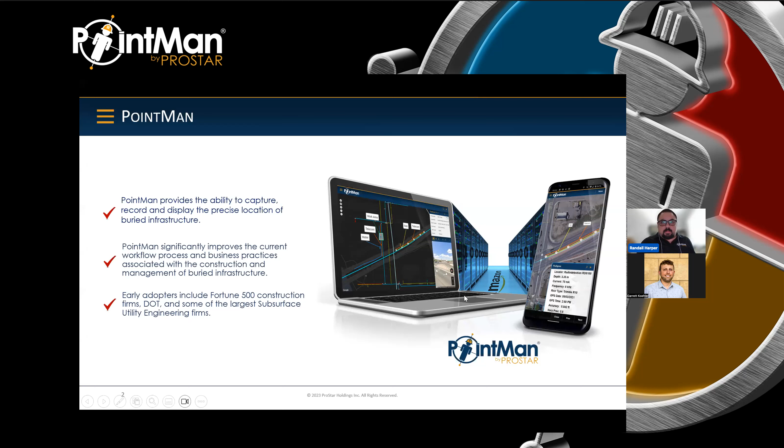It impacts several industries, including construction, DOT, oil and gas, engineering, railway, municipalities, mining, and utilities.

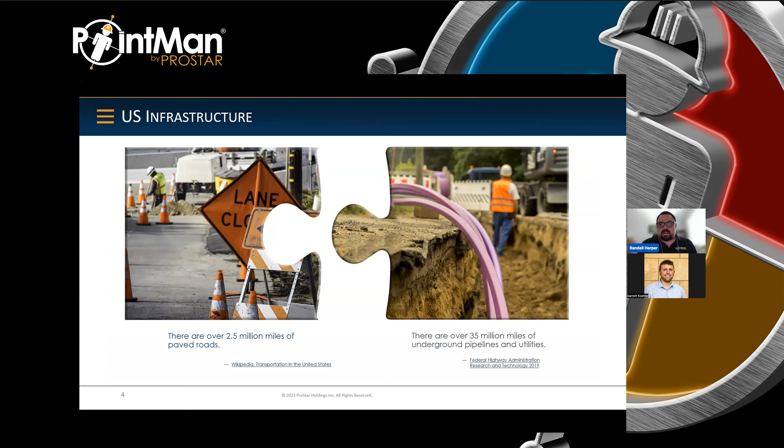At least in the United States, I'm sure this is true in Europe as well, you have surface features like roads and utility poles, and then underground features. There were 2.5 million miles of paved roads, and there are 35 million miles of underground pipelines and utilities. But the fact is you can't work on one without working on the other.

So how do you deal with that? When you live in a major city, this is kind of what it looks like underneath the ground. This is obviously a worst case scenario, but it looks like this pretty much across the globe, because when people first started using pipelines and cables to bring water and sewer to places, it started without any record keeping and any regulations to say this is where things should go, this is how things should be. So it just became what we like to call a spaghetti bowl underneath the earth.

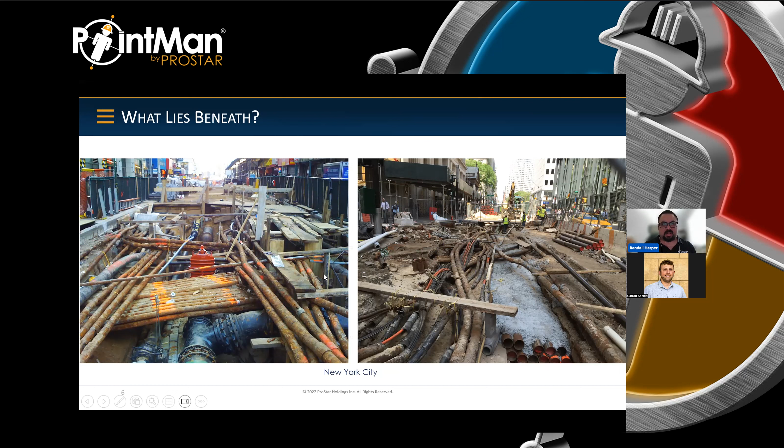These are U.S. industry statistics, but they're pretty common throughout the world, depending on how advanced your SUE is. This is 500,000, the number of strikes per year, according to the 2019 DIRT report. That's an estimated $10 billion that it costs to locate that underground infrastructure. And despite the amount we spend locating, there's still $30 billion in damages that impact the economy.

So these are just some pictures of examples of what can happen when you damage underground infrastructure.

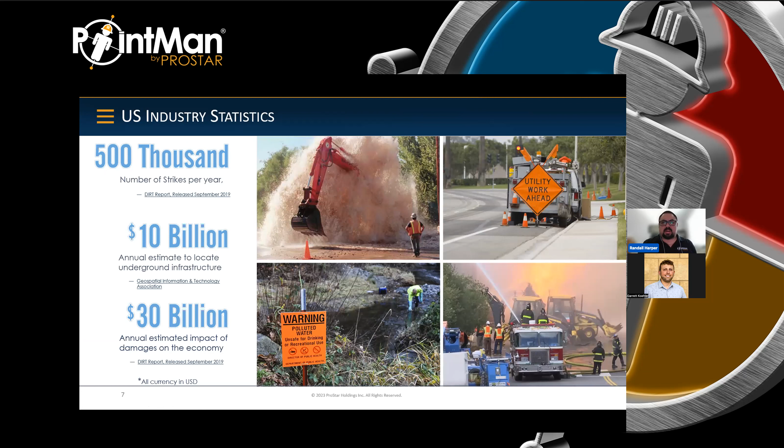All of these records tend to exist on paper maps or as-builts. So that's the big problem here: everything you do when you locate, especially in the United States, is put on these as-builts, and then your record is lost pretty much in the file cabinet somewhere right after.

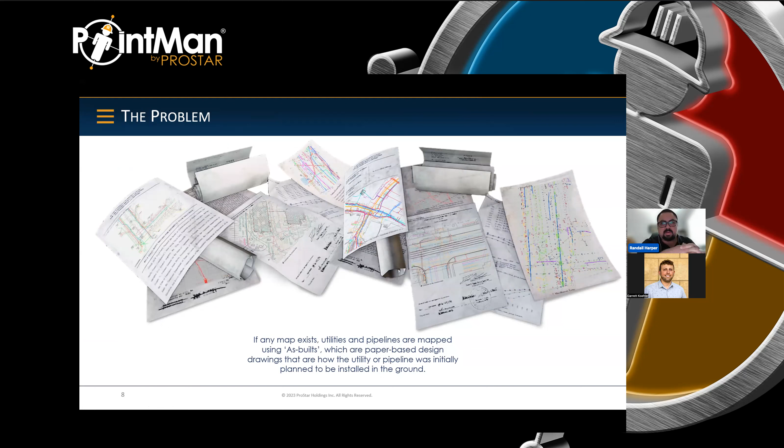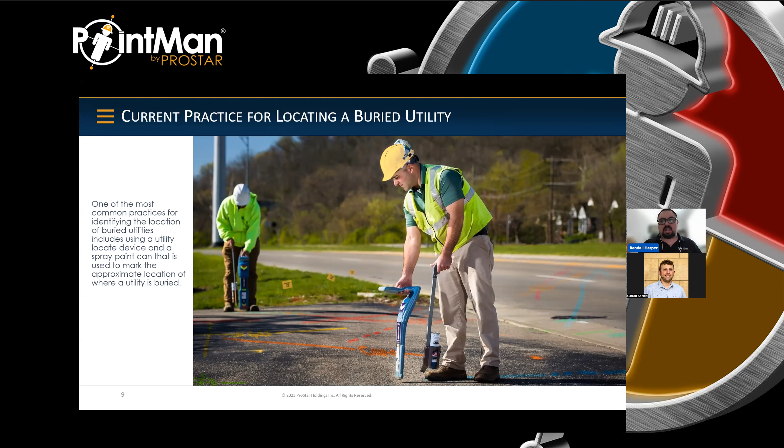This is the current practice for locating a buried utility using paint marks and a locator with no GPS unit attached. So while you might have, in that moment of time, a good capture of the data, it's lost forever because you're not actually capturing it with precision and accuracy. You get an approximate location of where the utility is buried, you mark it with paint, and hopefully a surveyor will come in later and record that data, but that doesn't always happen.

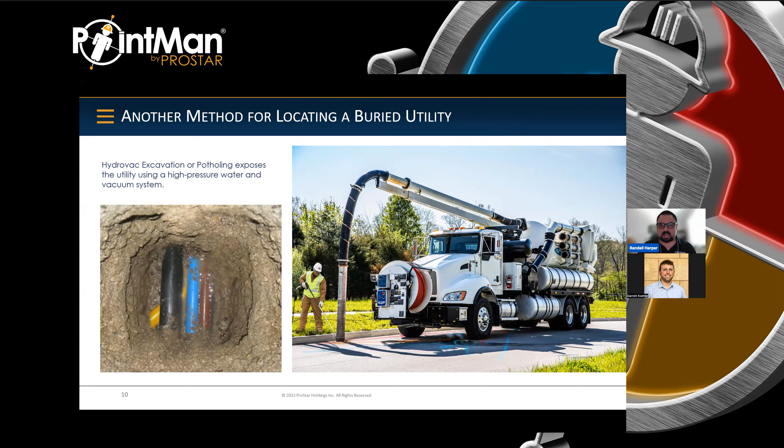Another method for locating buried utility is hydrovac excavation or potholing, which exposes the line directly, but it's expensive, it damages the surface, and it takes a lot of time to do. So it's not very common except on giant construction sites like highways and things like that, or large skyscrapers.

How PointMan works: you take your utility locate device and your mobile device and pair them via Bluetooth, then you pair your GPS to that same mobile device. So now not only are you collecting the EM locate device data, which is your depth, your current, and so on, but you're also getting the horizontal and vertical values as well, so you know precisely where that is located.

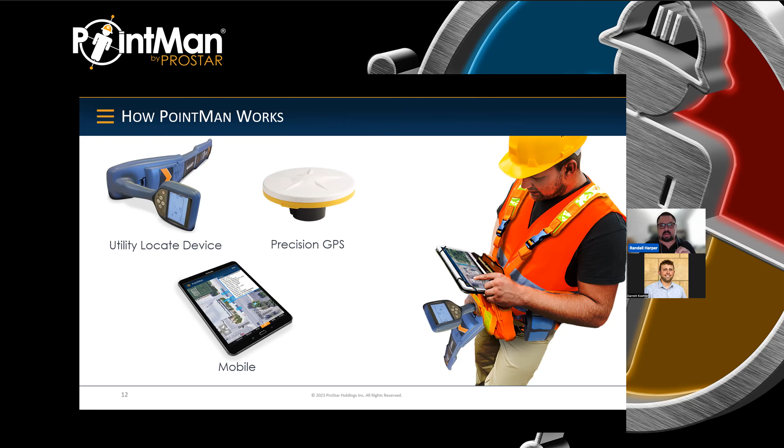For example, you might be locating a line that goes up the side of the street, and the reference they gave you on the as-built was that it was on the right-hand side over here. Well, that electrical line turned out to be on the left-hand side, and it turned out to not even be completely straight. This happens all the time due to ground conditions, such as maybe there's a big boulder under the ground, and you didn't want to go through it, so you went around it.

Another factor is a lot of these maps are drawn by GIS professionals or CAD professionals who haven't actually been to the field. All they know from the surveyor's notes or the engineer's notes is that it goes from A to B, and they might just have a direction on it with a length of line. It might say 35 meters west or 35 feet west, and that's as far as you draw it. You don't know if it curves or not, so you just draw it straight. And that happens all the time, at least in the United States.

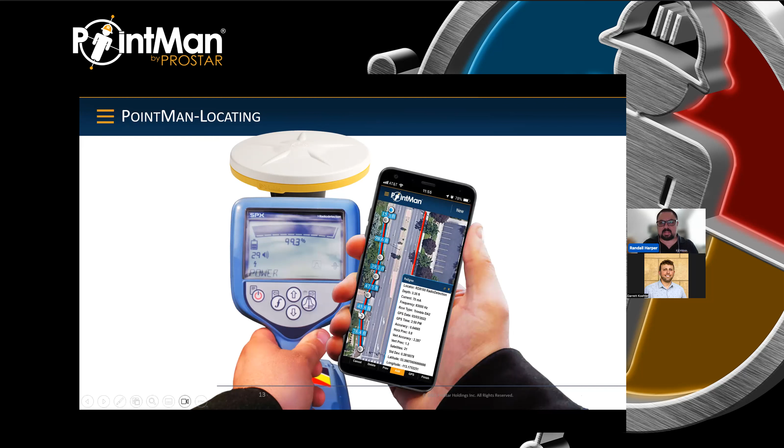So this is an example of what PointMan can provide. We have the ability to stake back to features that are already collected. You can see here that this point in blue where my cursor is, that is the selected point he's trying to find that he had already located previously.

In this box in the top right corner, it's actually showing you the west direction, the south direction, and the total distance it takes to get there. He's using his phone by itself, so the horizontal and vertical accuracy isn't the best, but you can still see in the right hand picture here that you can zero yourself in.

This time he's using an RTK, so you can see that the values are even more precise up here. That's the beauty of PointMan: you can use your phone GPS, or if you have the capability and the funding, you can upgrade that into an RTK GPS quality, so your precision will go even better.

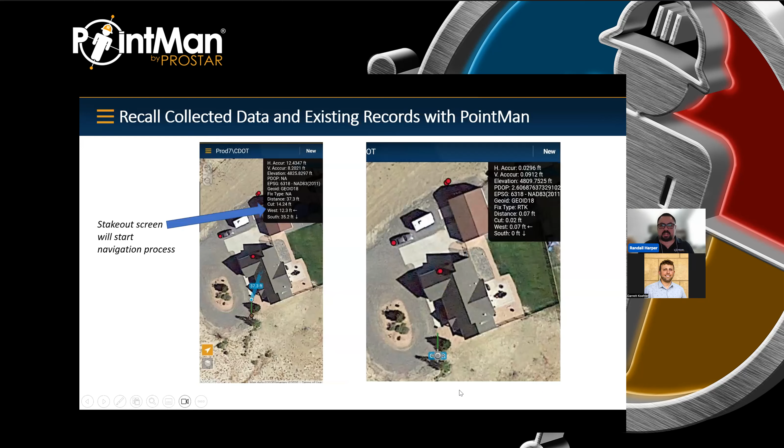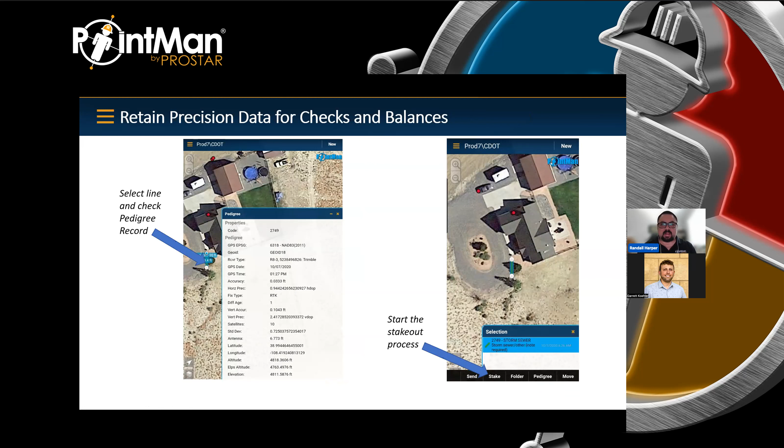This is the ability to look at your data and say, this is worth keeping, or this is not worth keeping. If you look at the precision here, you can see that this was done in RTK. The accuracy is 0.0333 feet, and it even has the HDOP and the standard deviation here. So if you're an engineer or a surveyor, you can actually look at that data and qualify it. I'll get into that a little bit later.

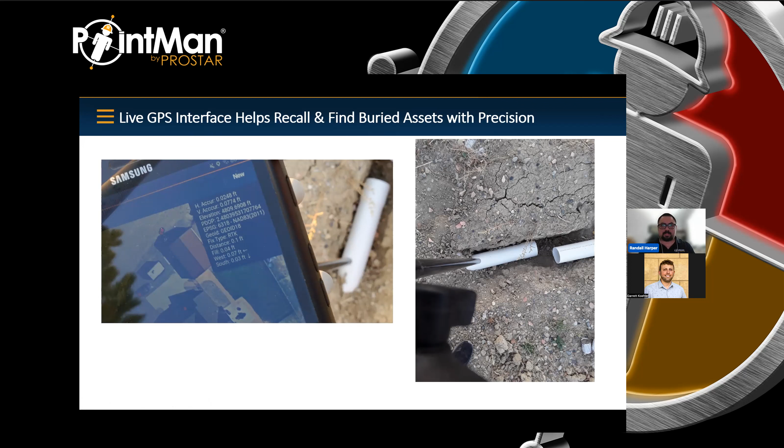This is just another example of the live GIS GPS interface. This is a screenshot of an actual phone, so you can see what it looks like through the perspective of the user as he's staking a line.

ASCE standards in Europe are much more strict over there than they are in America, but we're still trying to catch up. That's one reason why EM locating is so important here and why PointMan is becoming such a powerful tool for electromagnetic locates.

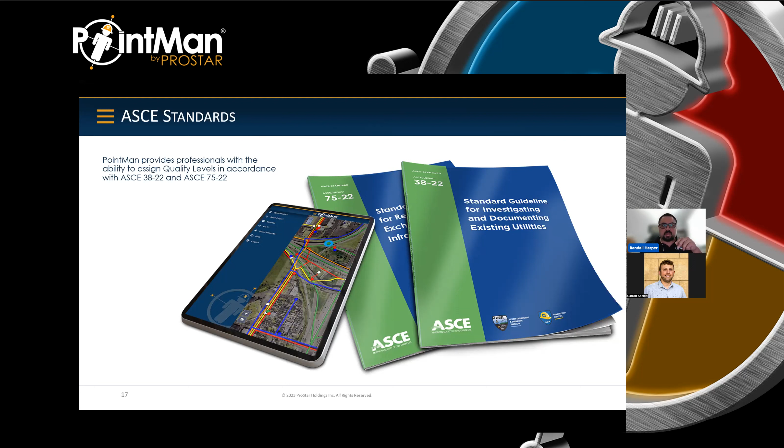We are able to assign quality levels through an engineer by using PointMan's collected data and other things like photos and sketch maps, as well as forms and things like that.

So initial adoption: we have Kiewit, who is the largest construction company in the United States, and CDOT. They mandated PointMan into Colorado state law. They started using PointMan because they actually ran a test on two large projects.

One of them was about 10 miles long with 150 people, and the other one was about 10 miles long with 200 people. They were both about $10 billion in value each. Well, one of them had PointMan. The one with less people, 150 people, actually ran PointMan on their staff.

Every member of the group had PointMan who was in the field, and they were receiving daily updates, constant updates, through everyone collecting data and sharing data, and everyone in the other project was not. They were still using paper maps and traditional methods to share their data.

Over the course of the projects, which was about 3 years each, the first project with 150 people and PointMan reduced their line strikes by 97%, to the point where they were literally having three in the last year. The other one ended up paying approximately 40 million more in damages and lost time and safety briefs and truck rentals that they couldn't use, and all those associated expenses, because they didn't have PointMan to offer the visibility and safety that it provides.

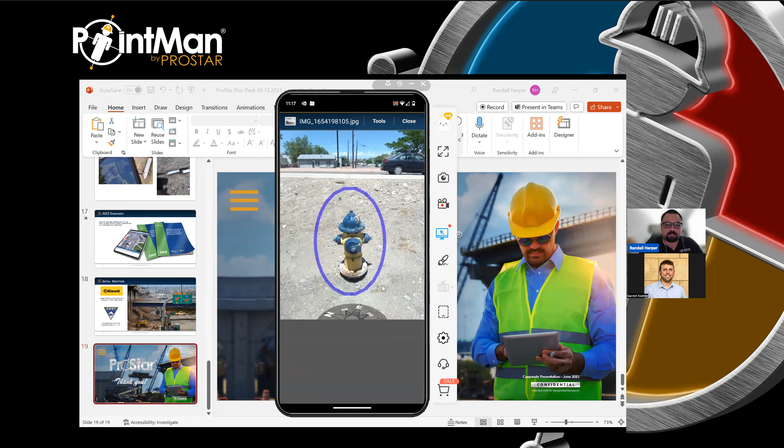You can see all this metadata in here. It even shows the user that captured it, what devices were used to capture and store the data—so, TDC 600. You can transfer data between devices by just uploading KMZs and shapefiles. If you had the cloud backend, you'd be able to sync everything through the cloud just by connecting to Wi-Fi or an internet service.

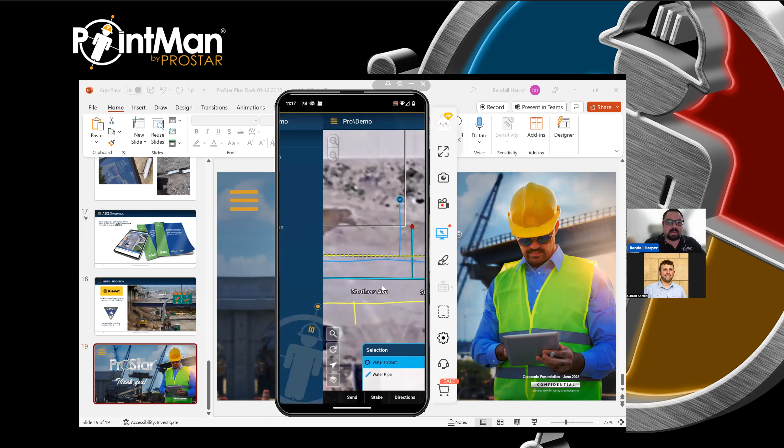But let's get into the backend here. So I'm going to go to settings. This is the meat of the system—this is where you would set up your device and connect it.

As I understand it, the latest and greatest radio detection unit has an RTK unit, so you would actually connect that one through the internal GPS device, and same with the locator. It would look like this, and you'd have your serial numbers in these two boxes on the right. There's a specific pairing process I can share with you, and if you're interested, we can take a look at the help file.

It goes to a sort of Wikipedia page, and you can see there are different brands that we can connect to—so radio detection as a locator.

Right now, as I understand it, we won't be doing a public announcement until Utility Expo, which is in two weeks. That's when our website's going to be updated with the RTK model. But for now, this is the pairing steps, and it's pretty simple.

You just go into set your Bluetooth to ASCII, turn your Bluetooth on, and then go to pairing mode, look for BTPC, and the Bluetooth icon will flash—that's when you can pair with your phone. When you pair it, you'll get the serial number here after going through configuring Bluetooth and pairing your device. So it's a pretty simple step process.

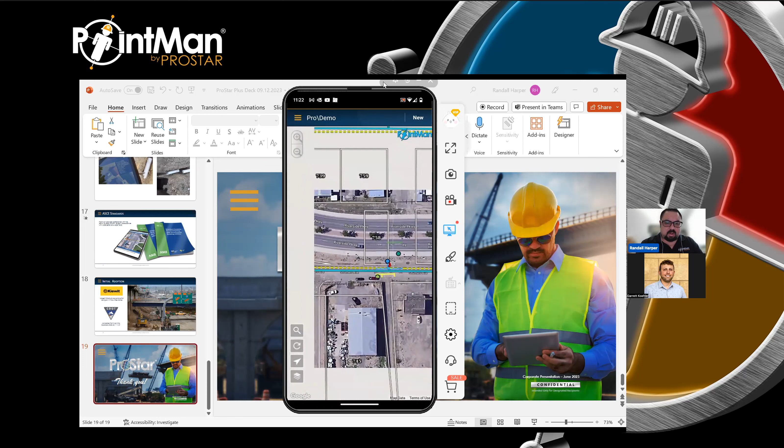Yeah, that's kind of PointMan in a nutshell. I'll just show you quickly how to capture data and then I'll open the floor. I know it's late for you guys, so I'm trying to make sure this doesn't take too much time. So I'm gonna hit the new button and choose my system here.

I'm gonna go with telecom, and you can see here I have a bunch of things in the data dictionary. These are all fully customizable, so whatever you want in here, whatever you're collecting, you can get it in there. So I'm gonna choose cable in this case, hit OK. It says owners required, so I'll just add an owner in here and call it XL.

Now it says failed to locate. That's because I forgot to set this to internal since I had it set on radio detection before. I'm not actually connected to a unit because I'm indoors right now, so it would be kind of useless. So I'll turn off my GPS and hit the add button. And merely by tapping the screen, I can draw a line out, and all I have to do is hit finish.

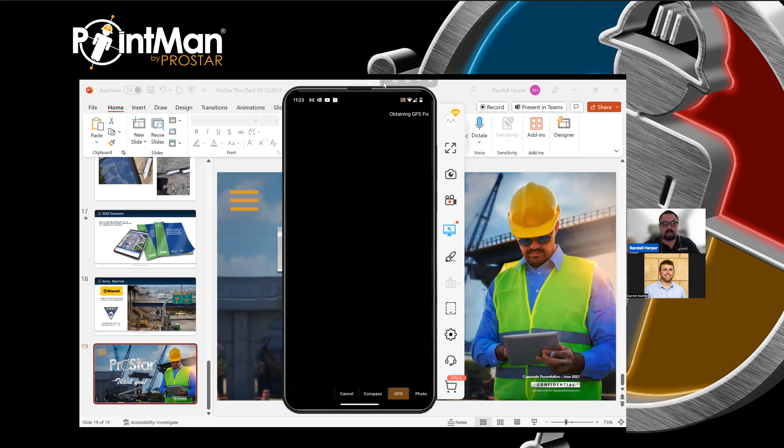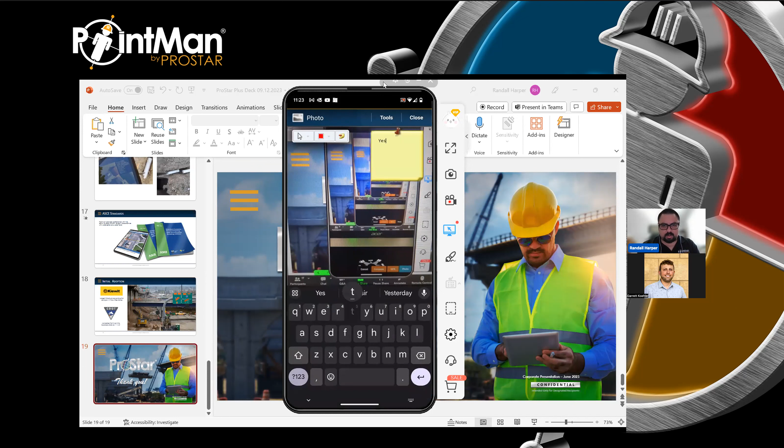So just like that, I drew a line in. Now, what makes the integration with radio detection even better is that you don't actually have to tap the add button and then tap the screen to capture data. Because we're integrated with radio detection, all we have to do is hit the locate button on the actual hardware and it'll save directly to the PointMan application. It's just that easy.

All right, here we go. So NTRIP is really simple.

As long as you have, we have Trimble Catalyst and RTX sort of natively included, but you can always add a custom one. We can do DIP or NTRIP.

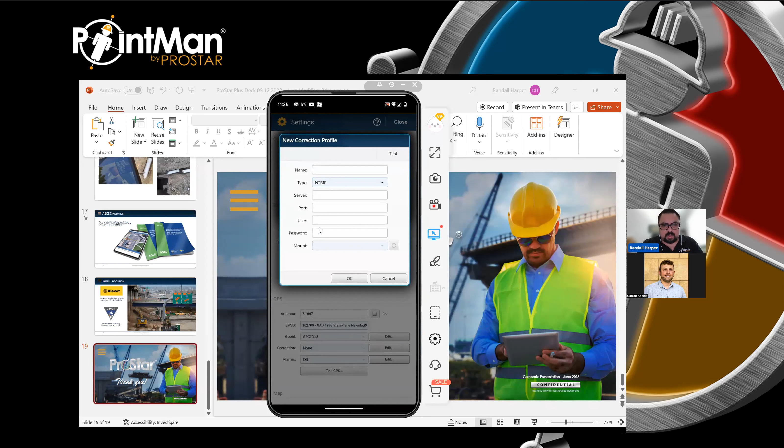All that's required here is the server info, the port, your username and password. Once you put those in, the name is optional, but I would always name it something in case you have a lot of connections.

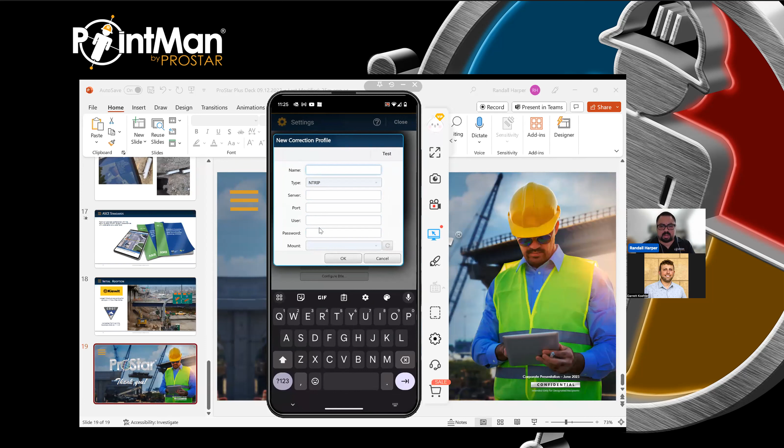Then you'd get an option to choose a mount down here, and you'd just choose the local mount, the mount being base station, whatever's local to you, and then you'd be able to connect to your NTRIP service.

So it's really quite simple and it remembers it, so you don't have to constantly keep doing it.

All right, let's see, another question. Can you add points to an existing project and snap them together? Yes, so I'll actually show you that right now.

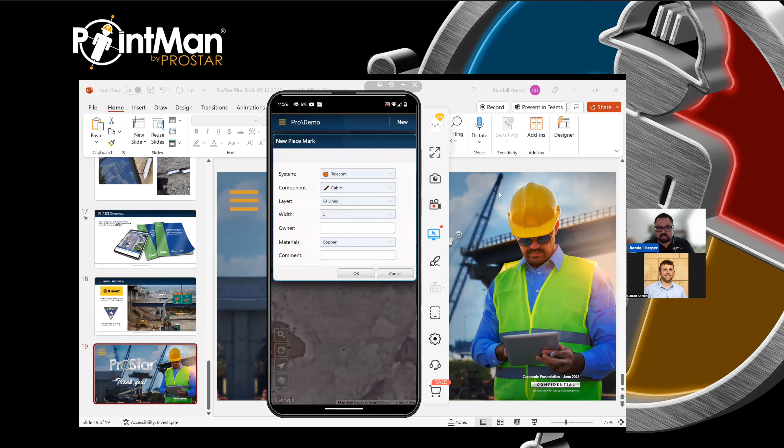Let's say this line right here that I highlighted was done a few weeks ago, and you came back because they did construction and they added a new line there.

There will be like a little bridge, so to speak. Because of the way the zoom works, you'll have a little gap there that is gonna be connected, and you'll see what I'm talking about when I do so.

Now I'm gonna hit the add button and draw this line out. I'll just draw it a couple steps and then hit finish.

You said snap, but I'm wondering if you meant join. You can join these two lines together so there's no gap between them. Either way, you would hit move and choose the feature that you want here.

I'm gonna choose join just to connect these two lines, and it'll bring up a little dialog. It says join, and if I join them at that point, you'll see that they're connected, between the two vertices that you last captured.

And now this is one long line.

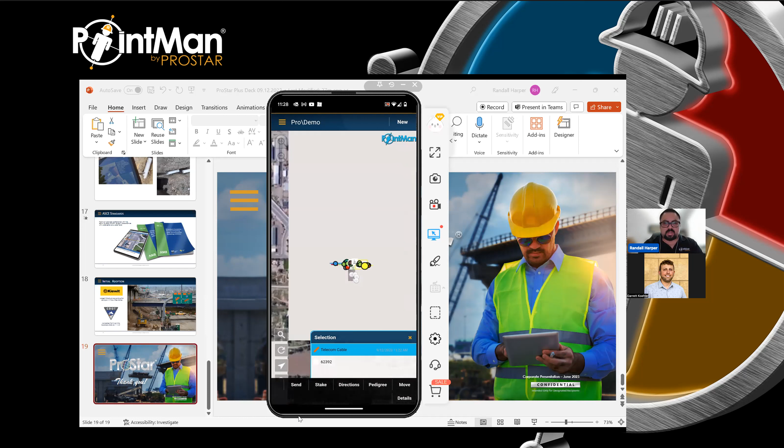Yeah, there is a way to walk back to an existing feature. I'll just add the caveat that I am indoors, so my GPS might fail me right now, but let's try it out.

So I'm gonna choose this fire hydrant that we looked at earlier, and I'll hit the stake button.

Right now it's obtaining GPS fix. What it's doing is, because my viewport is centered, it's using the center of my viewport to navigate me to that point.

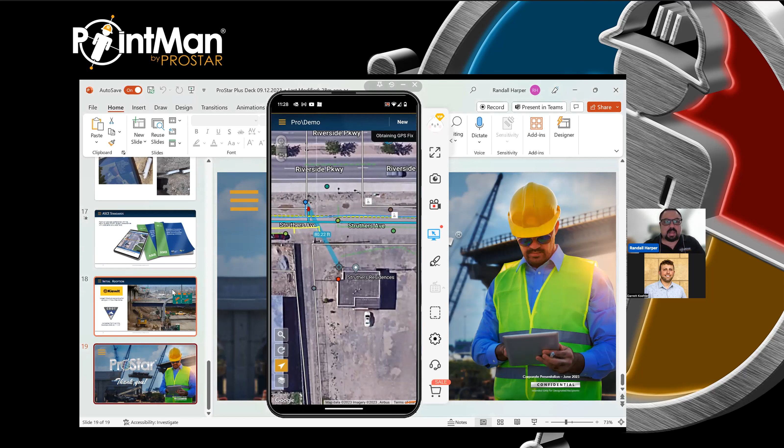Just like those screenshots I showed earlier, like this one right here, you can see that black box where it says obtaining GPS fix, it should have those details in there if I were to have a GPS fix from being outside.

And it would navigate me from that point where the target button is, directly to the feature that I'm selecting.